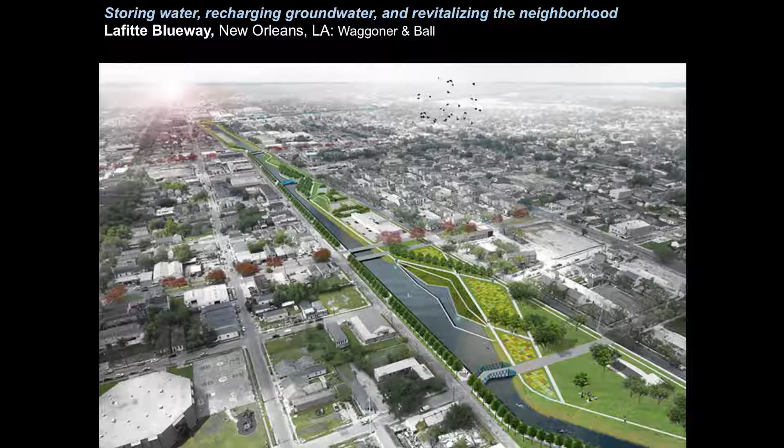I'm going to start with this image, which I hope most of you will recognize. David Waggoner is going to be speaking after this session at the plenary. Waggoner & Ball has done incredible work in New Orleans, thinking at a big scale about the kinds of infrastructural moves needed to help New Orleans absorb more water, while also enhancing quality of life and helping revive and boost neighborhoods.

So the Lafitte Blueway is the retrofit of an existing canal that goes all the way out to Lake Pontchartrain, from the French Quarter, but now widening and deepening it, allowing it to absorb much more water over time, and also having the greenway infiltrate more water and replenish the groundwater.

These kinds of big ideas and big moves can be absolutely transformational, but there aren't a whole lot of them. The Dutch do a lot of this, and I think that's also where Waggoner & Ball have been looking.

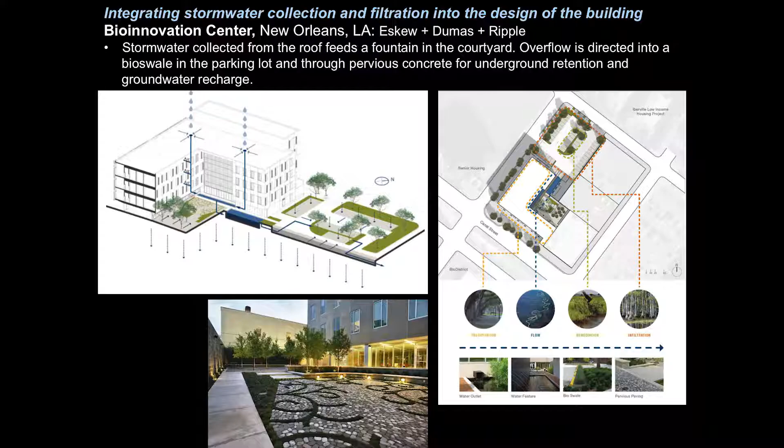But my only but here is this is an urban project. This is right in New Orleans, in a very urban place. There aren't so many of these out in the suburbs. Is it just that we expect innovation to only happen in the cities? Why do we need this in more suburban contexts?

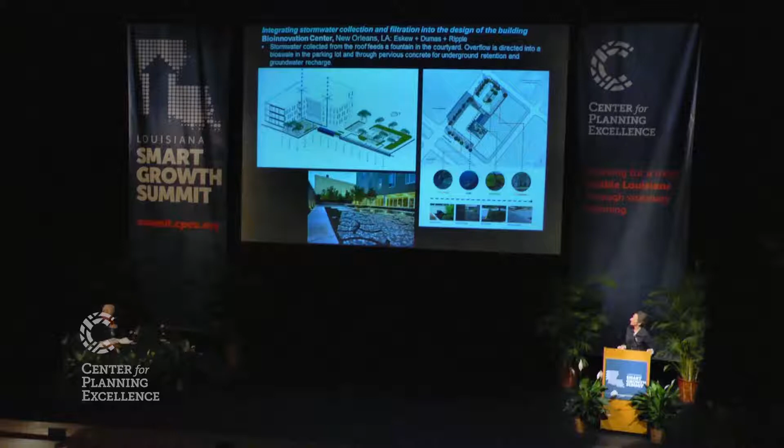I want to posit that, and keep going. So dealing with issues of water quality, I'm going to show a couple case studies. One common and terrific strategy is to daylight culverted creeks. The more you expose water to sunlight, to UV, you actually improve the quality of the water. You also expand the amount of space, how much capacity it has. It's really returning it to being a creek. You also often tend to increase property values because now it's a much more attractive amenity than just a pipe underground that nobody can actually see.

There are projects reconstructing wetlands, and I'll show some of those. Again, the strategy in almost all of these is to try as much as possible to infiltrate that runoff as close to the source. Wherever those raindrops fell, you want to try to get them into the ground as close to where they fell.

One of the new tools we have, and this is to see if you're awake, I thought the poo-sniffing pups would actually get a little giggle or post-lunch smile. Anyway, we do have some new tools in water quality.

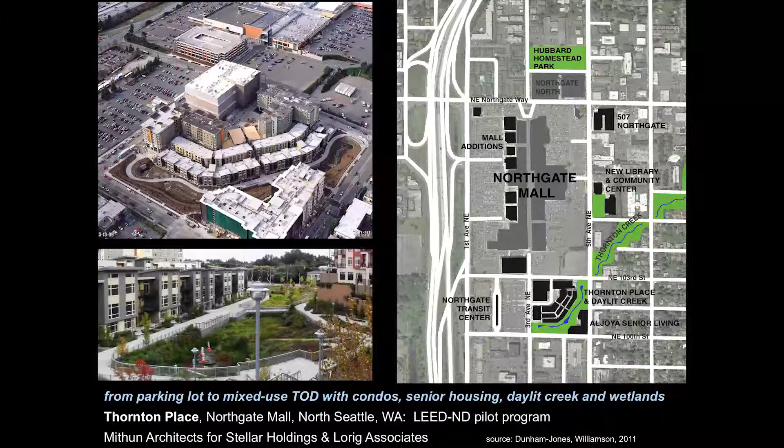Why there's a delay. All right, so here. This is an example in Seattle of daylighting the creek, the culverts. This is not a dead mall, this is actually a thriving mall. Here's just the end of it. Northgate Mall used to have just an enormous amount of parking.

They wanted to expand, but local environmentalists were still mad at them because when it was built in the 60s, they had paved over the headwaters of one of the four salmon creeks. So it really fell to the mayor to get the mall to do a land swap where they gave up a third of their parking lot. This has now become a transit center. It's bus right now, it'll be light rail in 2020.

Then they gave up this portion, which has now—the culvert is actually still way, way down, about 15 feet underneath the parking. But they've dug out everything above that, redirected the creek on top of it, so they can still get some overflow with the culvert. The creek is now daylit, and in this water channel you can see, under construction, how deep that is. It's really highly engineered, capturing the runoff from about 600 acres surrounding it, much of that parking lots as well as highway interchange, so those sewer inlets are all coming in, where it gets cleaned and cleansed on its way down the creek.

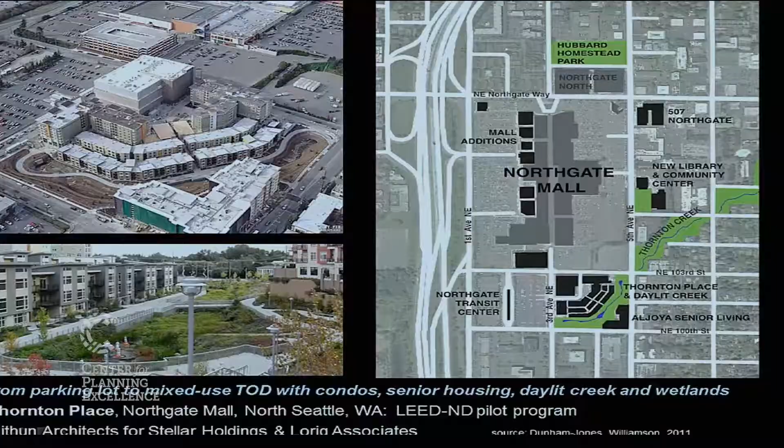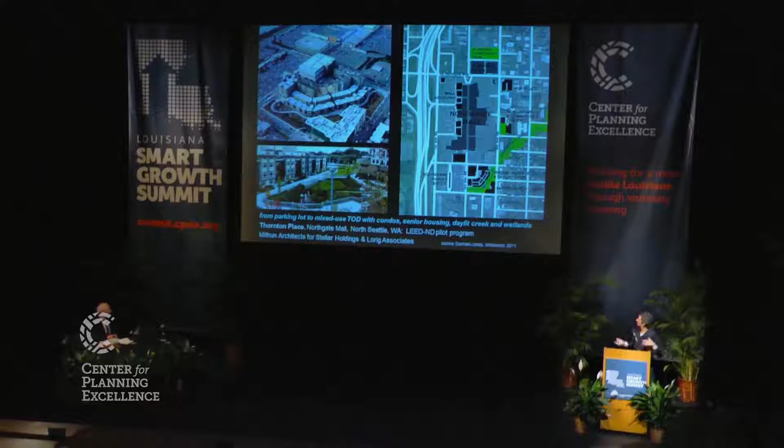They've also built senior housing in the foreground here, market rate housing, and there's an IMAX theater in there. But now, instead of just being a pipe in the ground, it's become this great amenity that people enjoy—there's a boardwalk, and people really enjoy watching all the birds and butterflies and plants in there. It's one of the more interesting, very successful examples of daylighting the creek and really improving the quality.

It was possible to get a grant to demolish the shopping center and reconstruct the wetland. They did that—I visited. That's my photograph; they built a beautiful wetland.

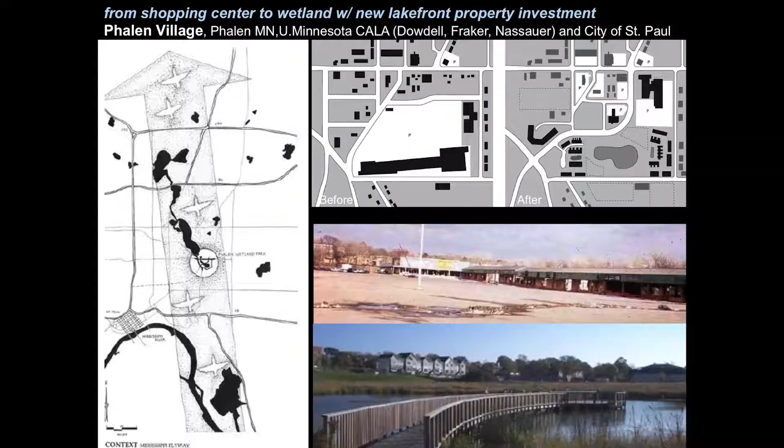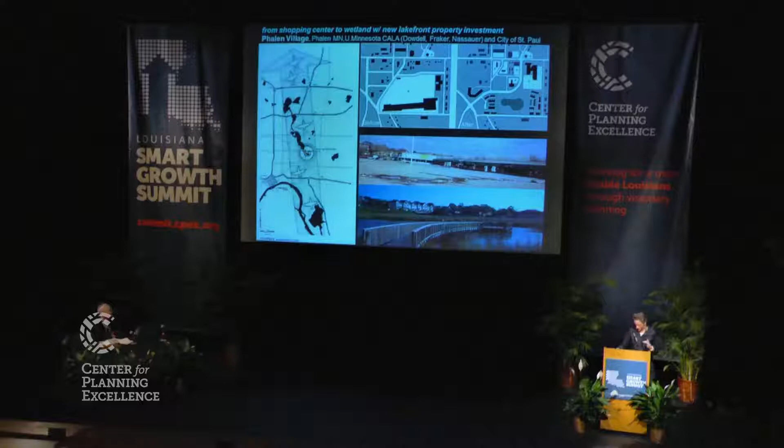Well, what that also did was create lakefront property and attracted the first new private investment in over 40 years to an extremely low-income neighborhood. So you really got this combination of the ecological sustainability of bird habitat with now new investment in a low-income neighborhood. Many more new buildings have come in since we drew that in 2007. So again, reconstructing wetlands is not an impossible thing, and it can have all sorts of additional pros that

come with it. So this is another example of building a wetland. There were already some ponds there in this case. This was a manufacturing site in a pretty suburban area in Wisconsin, a suburb that never had a true downtown. So when the industry failed, they decided to build their new town hall, town square, and then remediate some of the toxic soils by expanding what had already been some wetland into a bigger wetland.

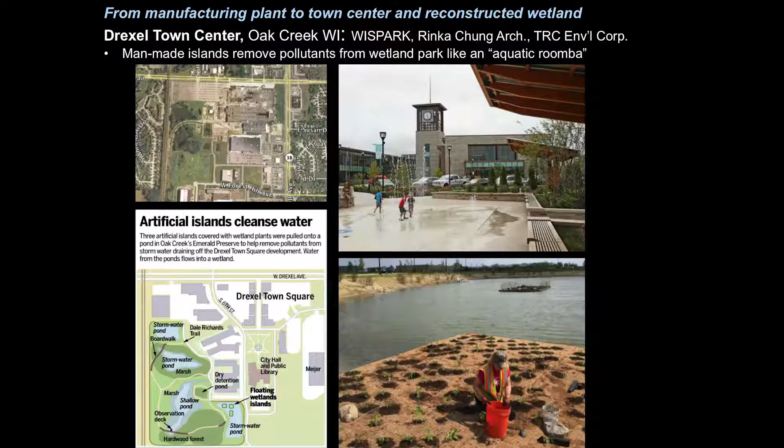And then they got these artificial islands that kind of work like Roomba vacuum cleaners. The islands are automatically piloted. They roam around the wetland, and they're planted with plants whose roots dangle, and as it moves around, the roots pick up a lot of the metals, and the microbes on them help clean the water. It's just interesting. These are all new technologies that are out there that people are using.

This one is, I think, kind of interesting. I'm going to show a couple. Minnesota, the land of lakes, its weather is quite different from Louisiana, but in some respects its geology is also rather sponge-like. So it's not completely inappropriate. And the watershed, the Ramsey-Washington Metro Watershed District, was very concerned about the degraded quality of the water in the lakes. There were lots of algae blooms, a growing number of problems, fish kills going on.

So they started with an audit of their commercial properties within the watershed to see who were the culprits. The mall, not surprisingly, with a big parking lot, was one of the leading contributors of phosphorus and sediment into the lakes. The mall owner didn't have to do a thing, but the Watershed Authority got about $5 million in grants and did 4 different phases of development on this project. They put in a lot of rain gardens, so instead of the all concrete and gravel tree island, the concrete curb breaks so the water from the parking lot drains into the rain garden.

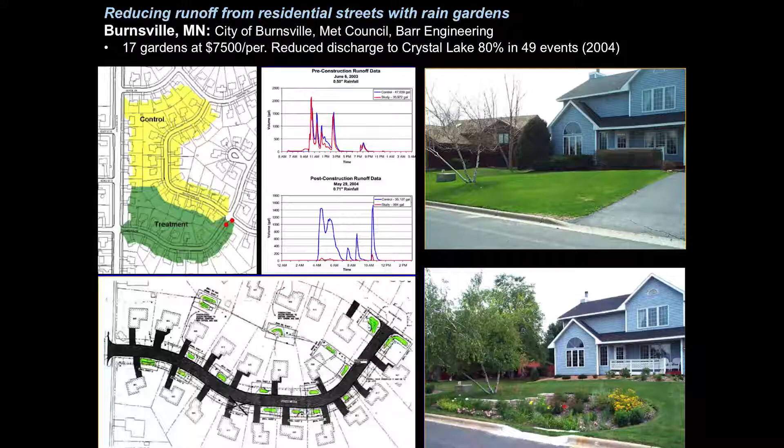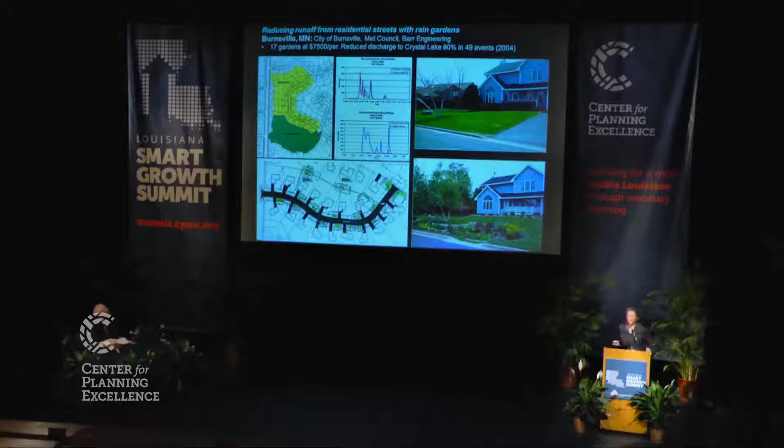And they found it cost about $7,500 per garden. But it reduced discharge to the nearby lake 80% in 49 events in 2004. So again, they were pretty happy with that. And so then they scaled it up even bigger, went back to Maplewood and said,

Oops, I keep doing that, I'm sorry.

So they took now 2 miles of streets and actually started thinking about, all right, the rain gardens are really effective, but we want to really make these living streets. We want to put in sidewalks, we want to deal with bikeability, walkability, a variety of things. So in this case, what they're doing, here's the old right-of-way.

The streets were about 31 feet wide. Now they're building the rain gardens and new tree wells inside the right-of-way, narrowing the street to about 24 feet. Again, the neighbors adopt the rain gardens, they give them a variety of flower packages they can choose from. And they have public art in some of these, but they're really building in that walkability with all of the sidewalks. And they found it's really been incredibly successful.

95% of homeowners do take care of the gardens, even after they've sold the homes. It's improved property values. These streets have more value with the rain gardens on them than the streets that don't. That led the city to then adopt a living streets policy for the entire city. So this small city of 30,000 people has 700 rain gardens and growing.

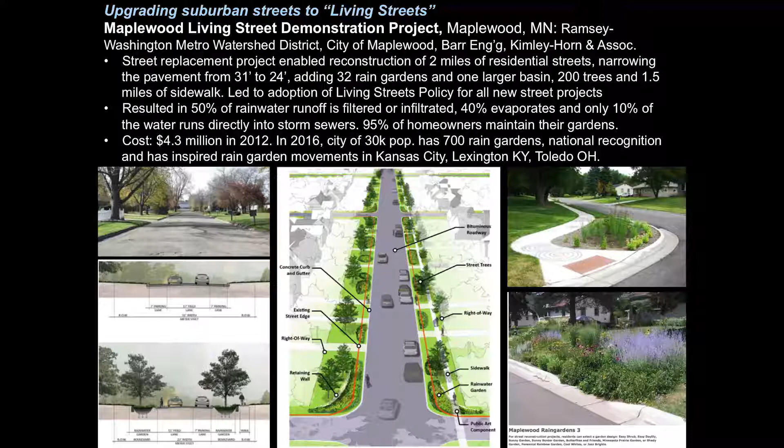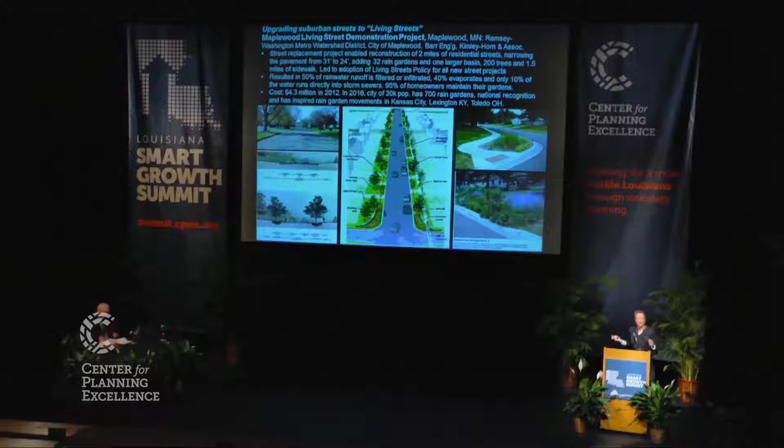That has now also inspired rain garden movements in Kansas City, Lexington, Kentucky, Toledo, Ohio, a number of other places, kind of recognizing that these are fairly simple, incremental moves that perform pretty remarkably well. So that's where the motivation was water quality. It is also helping very much with reducing the amount of water that's going into the sewers.

So what about when there's just too little water? You're in a place of drought. There's a lot of it. Generally, the strategies are, capture and reuse the water as best you can. You want to try to institute conservation, get people to not use as much water, and you can design landscapes, xeriscaping and things. And then most importantly, really, is, again, replenish groundwater. That one comes up with every strategy.

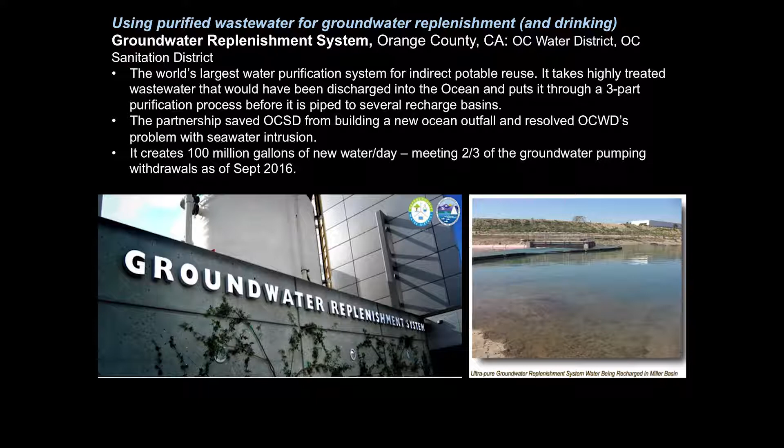So the biggest and so far apparently most successful groundwater replenishment system is in Southern California. And luckily they started this before the rather epic drought that they're in right now. They're right on the coast, and so they've been having not only problems with their aquifer, they've been draining their aquifer for years, they also have the problem of saltwater intrusion, same as here in Louisiana. So they're replenishing the groundwater using treated wastewater.

So basically, the Sanitation District got together with the Water District, and now the wastewater that used to be treated and then dumped into the Pacific Ocean is treated and then purified through reverse osmosis to an even higher level of purity, and it's then piped to the recharge basins where it slowly infiltrates back into the aquifer and is helping to reduce the saltwater intrusion. And then that is the water supply.

On the one hand, it's gotten some grief as an example of toilet to tap. That's the media description of it. But it reduces the yuck factor because they're really putting it back into the groundwater where it's mixed, and it's super purified, and it's actually increasing the quality of the water in the groundwater. It's really been seen as remarkably successful. They basically say, we're creating new water this way. And they have been saving a pretty enormous amount of water by treating wastewater.

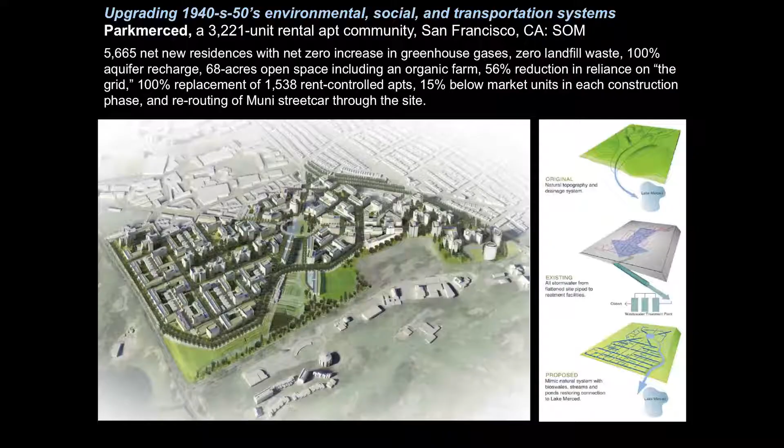So it's been drained for 70-some years of all the rainwater that would have been flowing into it, and now it's in drought, extreme drought condition. So new developers have bought up the project, and the plans now, SOM has done some really pretty remarkable planning to make this an incredibly sustainable project in terms of transportation, in terms of social equity, in terms of all sorts of things, but in particular, in terms of water.

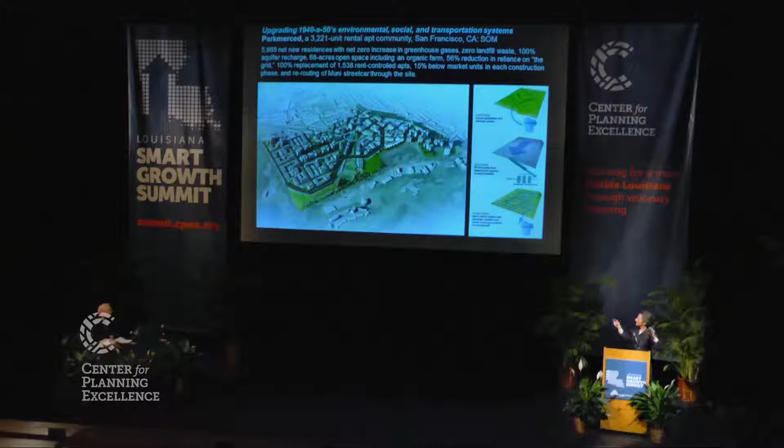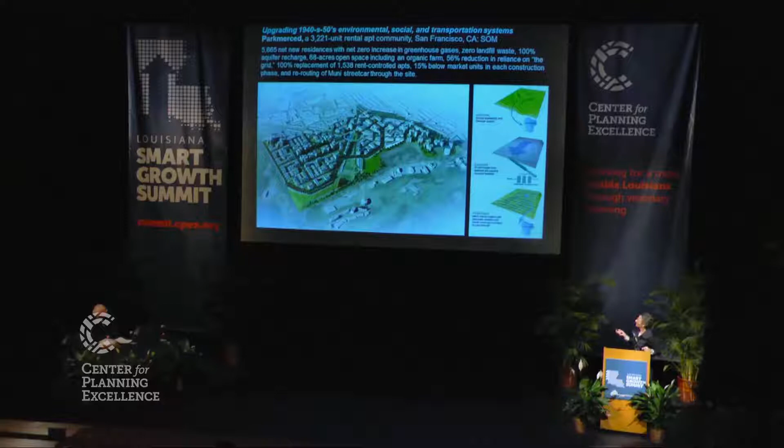They are trying to return it back to the original site's condition where every bit of water drains into that lake. So instead of going into the pipes now, job 1, they're removing every single pipe. So every bit of water that falls on a roof, on the ground, on a street, will find its way into now a highly agriculturally determined landscape. And they're doing this while they're more than doubling the population. So it's going to be an interesting one to see.

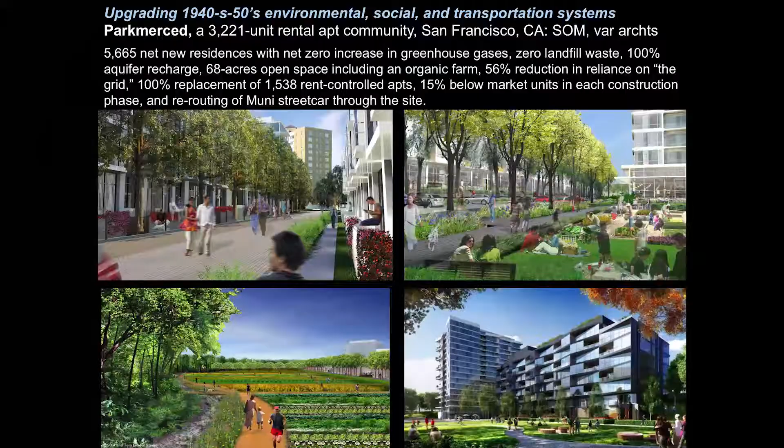These are some of the early renderings where you see a permeable pavement on more of a paseo, not a driving street, but also now with the stormwater trench to capture and collect rain from the roof and then drain it to some of the farming, a lot of urban ag being integrated and woven into this very high density project.

And this is one of the more recent, just I think last month, renderings of one of the new buildings that's about to break ground. I think 4 are just starting right now. So pretty interesting to see how this one really evolves. But I think that removal of the water in the pipes and rethinking how we treat that landscape so that it can absorb as much water as possible. They don't just want to have lawns.

It depends on soil conditions, but the average American lawn, if it is not aerated, you know, you roll the thing with the spikes on it and aerate it, it becomes just as compacted as asphalt after 20 years. So you get just as much runoff. It is just as impervious after 20 years if it's not properly maintained. And most of them aren't.

So here in Louisiana, there's also some really interesting questions: what do we do with the wastewater? Where should it be going so that it could actually be useful to help us replenish our groundwater? And so, I don't know if I'm pronouncing it correctly, Luling Oxidation Pond Wetlands in St. Charles Parish is, I think, a pretty fascinating project where the treated wastewater is being piped directly into the wetlands to both help replenish and revive the wetlands, but also because the wetlands are one of the best places for carbon sequestration. You've got so much biomass and living material that is just absolutely sequestering all of that carbon.

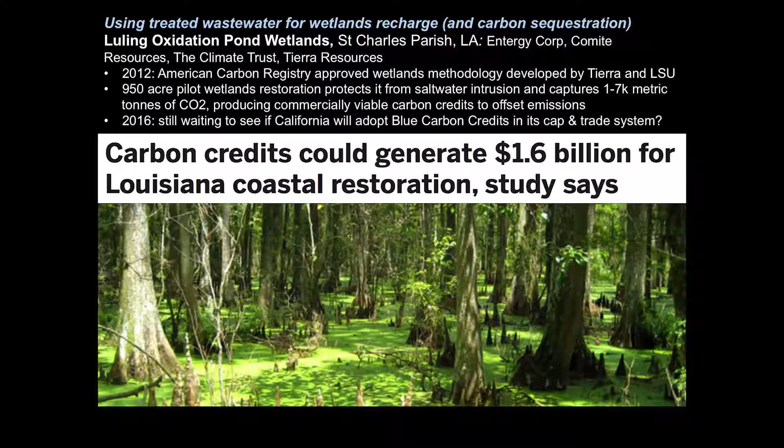California right now is the only state that requires companies that have emissions to buy offset carbon credits. For other companies it's voluntary, and so there's the opportunity to actually pay for restoring the wetlands by selling the carbon credits and using wastewater as one of the real strategies to do that. Again, a pretty interesting question.

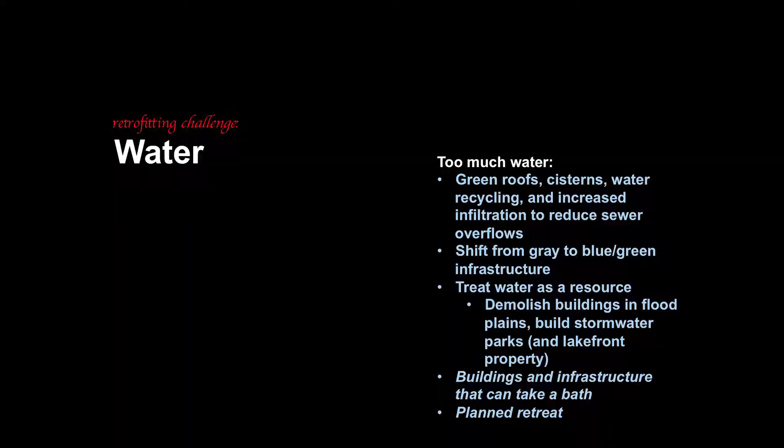So now we get to the question of flooding and too much water. What are the strategies really when you have just simply too much water? At a building scale, you build green roofs, cisterns, you try to introduce water recycling, and again, increase infiltration any way you can to reduce sewer overflows. In general, we're seeing a shift from gray infrastructure, the world of concrete and culverts and steel pipes, to blue and green infrastructure, more building of wetlands, building of bioswales, using ecosystems and ecosystem services to do what they naturally do with water, which is cleanse it and convey it.

We're seeing also some pretty exciting projects that really begin to treat water not as a problem, but water as a resource. Certainly, as I showed in the earlier example about lakefront property, people are attracted to water. Water, when it's not a threat, absolutely enhances property values and enhances our quality of life. So increasingly, there are opportunities to build stormwater parks that can take a bath now and then. They're designed to hold the water, but they might be beautiful parks during most of the rest of the time.

I wish I saw more examples of buildings and infrastructure really designed to take a bath. I think we need more of that. Then there is the discussion that still needs to be had about, are there times when you simply start to plan retreat, if there is too much water, too much flooding, too much subsidence, and those kinds of issues. So some examples.

So this is an interesting example, and I try not to show too many examples from Portland, Oregon, because everybody rolls their eyes and says, oh, Portland's the exception. We can't do everything that Portland can do. They're too far ahead. But what's useful about this example is I think it actually points to an absolutely common issue. So this is not in downtown Portland. This is the other side of the river.

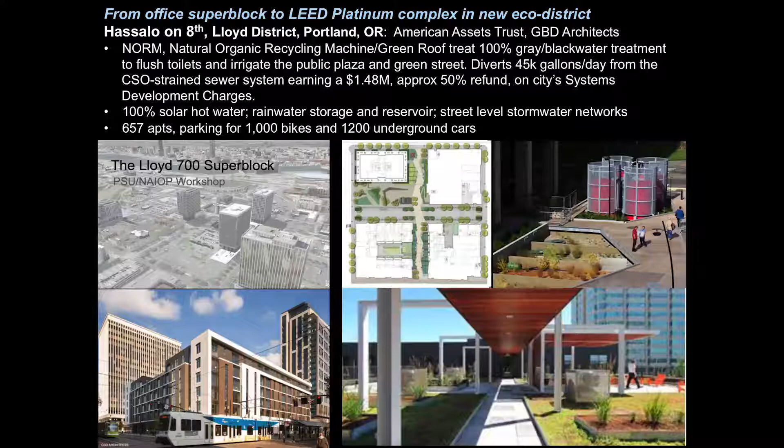What's also interesting about this project, I think it's worth mentioning, because it is on light rail, they didn't build a whole lot of parking spaces. There's parking because there's also retail on it, but for the residents, they actually built more bike spaces than parking spaces. So there's 657 apartments and parking for 1,000 bikes.

And in the first 3 months, when I think they were about 70% leased up, every bike parking space was already gone, and the car parking, they still had tons of it. So they've actually had to rethink; they're going back in and taking out car parking, putting in more bike parking. But it is Portland. That's so Portland.

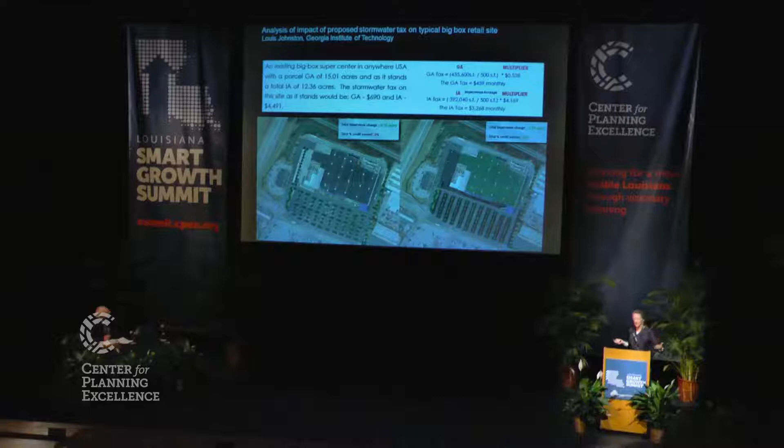And so on the topic of how do we charge for water, Philadelphia now has stormwater utility fees, and you are taxed based on how much impervious surface you have. A student of mine did a little study of what if you did tax people, but you also gave them a tool so they could figure out that if they put in green infrastructure, a green roof, planted more trees, you'd give them a break on that utility tax.

So in this example, a typical big box might actually owe, for its impervious acreage, as much as $4,000 bucks a month, but if it did a lot more of the green stuff, it could drop that significantly. Well, I think it would drop from the $4,000 then to the $3,000. So, people are playing around with these things.

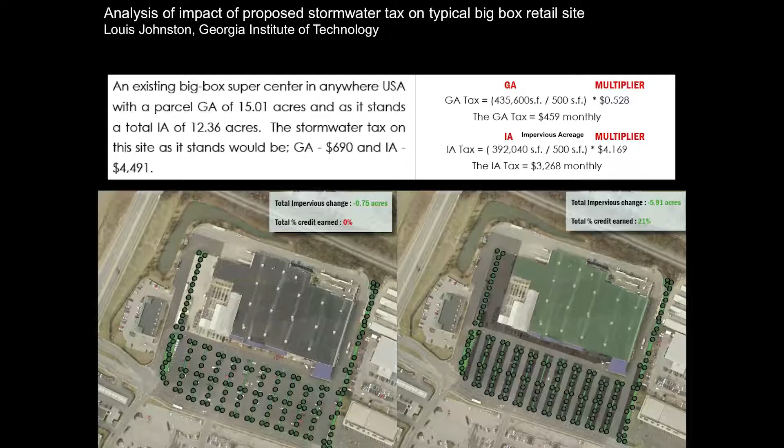This one I really want to succeed. I'm waiting to see what actually happens.

This is just north of Philadelphia, a 500-acre office park. When a dead mall dies, it's 50 to 100 acres. When an office park dies, it's 50 to 2,000 acres. This one is 500 acres, built in the 50s and 60s, on top of 4 creeks. Because back then, you just put the creeks in culverts and assumed that wouldn't be a problem. Well, it's obviously become a huge problem.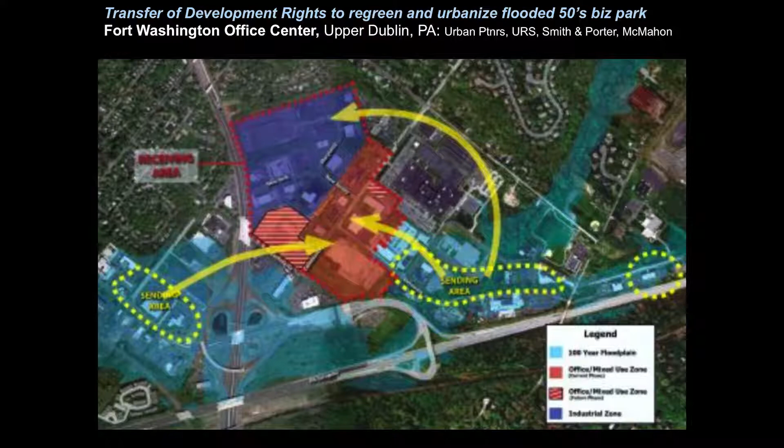The low-lying areas have been flooding like mad. So now they've set up a transfer of development rights that allows property owners here to sell their buildings and transfer their development rights to the high ground, which they want to see densified and urbanized, with a sort of new urbanist plan for how the high ground could be redeveloped. They're located right on a SEPTA commuter line, and if they got dense enough, maybe it could become a commuter stop to Philadelphia. So I think it's real potential, and the city is paying for demolishing the buildings that are being flooded all the time and turning it into park — not with a lot of trails, but really just returning it to nature, letting it absorb floods and be part of their resiliency planning for the future.

As far as I know, they adopted this about 1.5 years ago, and no one has yet used the transfer of development rights. Fingers crossed, because I do think it's a useful strategy, but TDRs are pretty complicated and often take a while before they work.

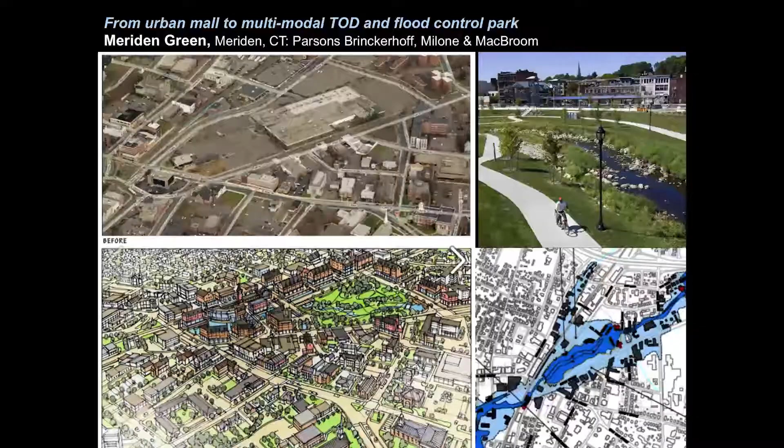Here's another example of building a stormwater park — somewhat similar to the last one. This is Meriden, Connecticut, a small town that built a mall with urban renewal money right in their downtown in the early 70s. We did that in a lot of places: built suburban-style malls in downtowns to help them compete with suburbia. Those are actually failing at an even higher rate than suburban malls. But this one didn't just fail — it flooded constantly because it was built right on top of a creek.

Here are the floodplain maps. They finally just gave up — it had been vacant for years — so they demolished it, and literally a month ago they opened their brand new stormwater park. It's designed to capture rainwater from most of the downtown and hold it during major storms, hopefully helping the rest of the downtown revitalize with an attractive green park at its center, having solved the flooding problem.

In Atlanta, we've had some of the same problems and built an award-winning stormwater park. But what's really interesting to me is how the interconnection of pieces that were not master planned together have come together really beautifully.

The big transformational project in Atlanta right now is called the Beltline — a 22-mile loop, essentially a rails-to-trails project. It started as a thesis project out of Georgia Tech, but has also become part of a 22-mile arboretum. It will have transit eventually; the right-of-way has been preserved, but the funding isn't there yet. We haven't even completed the whole 22-mile trail.

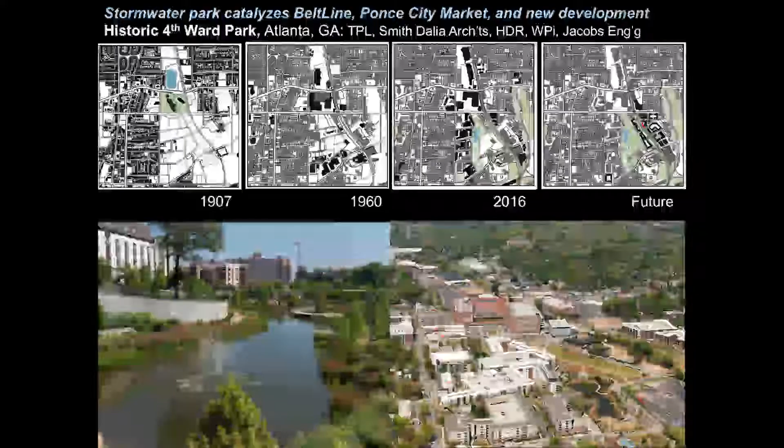Ponce de Leon Avenue here, North Ave here, eventually were to help people get to this amusement park and the lake. But then the city wanted more development, so they culverted the creek and successfully attracted Sears to build one of 12 major warehouse distribution centers in the country, sending out the catalog and all their goods. And of course it was located right along the railroad.

So Sears agreed to come in and they built this massive building on top of the creeks that had been culverted. Sears was there until the 80s, then they were out, and the city adopted this abandoned thing as sort of City Hall East, since they only occupied 2 floors and didn't really know what else to do with it. All the land behind it was just a big municipal parking lot, and it was flooding like mad.

The city was trying to sell this, and they actually, had anyone been to Chelsea Market in Manhattan? It's a similar big brick industrial warehouse building that's been completely re-inhabited with restaurants and little shops at the ground floor, cool innovative businesses renting up above, and some apartments. The mayor went to Chelsea Market in Manhattan and said, that's what our Sears building should become. And he happened to get the same developers interested.

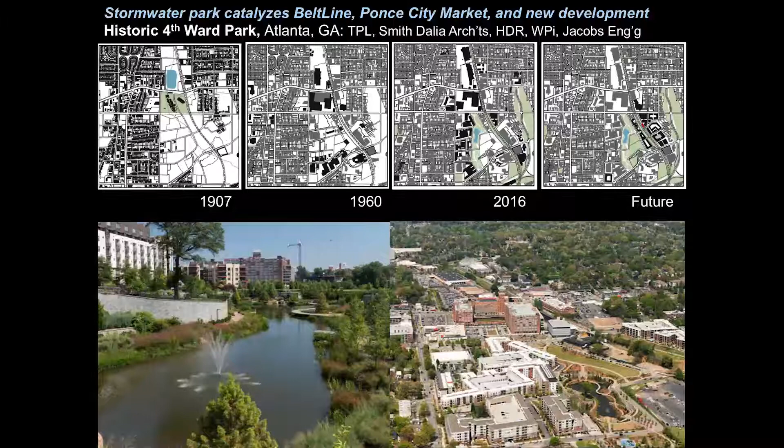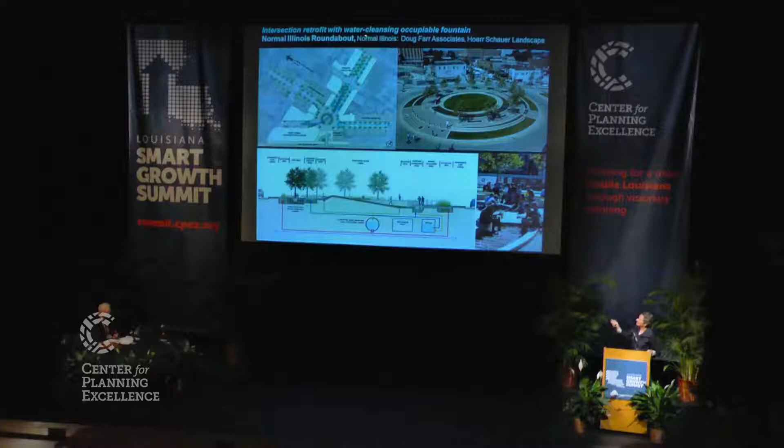So they actually set up deep tree wells, brought in street trees with tree wells that bring the water down to a new roundabout. The water comes from these tree wells to an old cistern they found, and also a new cistern they created. They then run it through little artificial bogs, these layers are the bogs, and it gets cleaned in the process, not to a drinkable standard, but to a touchable standard.

It's become an incredibly popular public space. People love to come, people are attracted to water, and then the water also goes back and actually irrigates the trees. So getting a loop and a cycle there, that's pretty great.

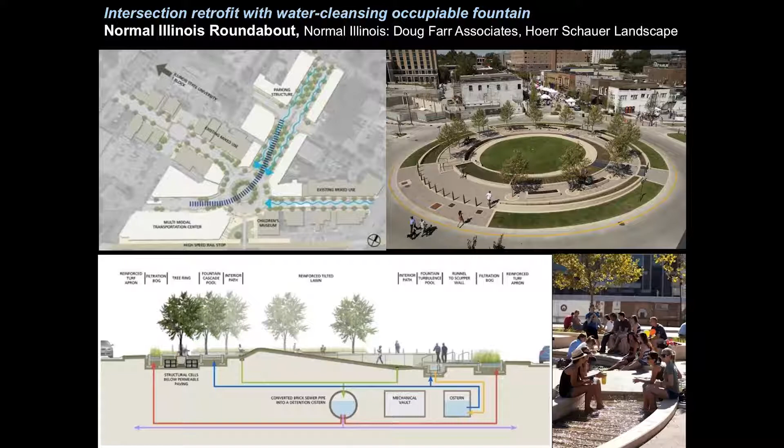All right, last slide. There we are.

I think, to sum up, I'm seeing a lot of shifts in practice. Certainly from when I was trained in school, it's not about getting the water away. It's keep the water, store the water, reuse it, infiltrate it on-site or locally. A lot more interest in treating wastewater as a resource.

I haven't shown examples, but there are some projects really trying to capture the waste heat, especially from wastewater, and recapture the nutrients from wastewater. There's a lot of this, especially for urban agriculture kinds of projects, and certainly replenishing the aquifers and wetlands just seems like such a smart thing. I'm glad to see we're doing more and more of that.

And in general, bioswales and rain gardens instead of retention ponds. We all know the old model, especially in suburbia, was you develop a property and on your lowest point you make a dry pond surrounded by a chain link fence—that's your retention pond that holds water for a little while, but it's just ugly. It doesn't add any value to the ecology or to property tax values.

All of these strategies, I think, are now leading to some shifts in policy. Some are happening, some probably should be happening, and some, I don't know, maybe they shouldn't be happening—so I put these in question marks. I would love to see a lot more regreening of defunct suburban property types.

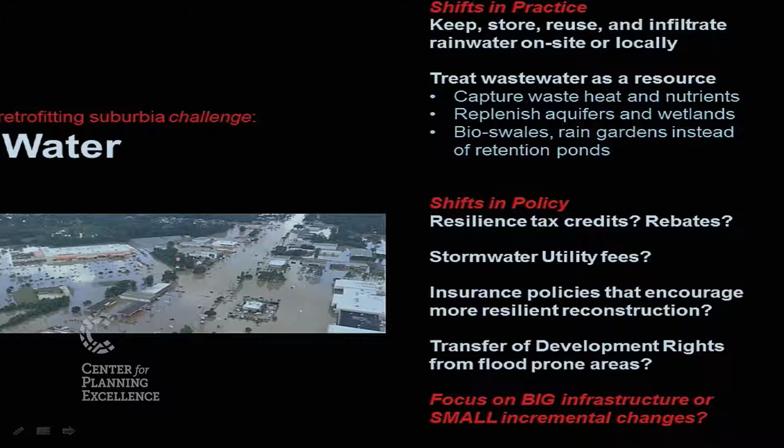Every community that has a dead mall, a dead office park, what they want is redevelopment, but the reality is when a property dies, there's a reason, and often that reason is the market has moved on—the loss of middle-class jobs that can support that use. Often it makes more sense to demolish, to regreen, to build in resiliency.

Of the 1,400 examples in my database, only 2% are regreenings. We don't have the kind of financial and legal mechanisms mainstreamed to really help this happen. We need a lot more of them. I'm throwing out on the table, what if we had resilience tax credits for something like that?

Some cities—Prince George's County, Montgomery County—have a rain garden rebate program where they'll basically pay you for putting in permeable paving in places or putting in a rain garden. Stormwater utility fees we are seeing in some places, and probably need to see in more.

One of the ongoing issues: every time we have a natural disaster, there are people pledging that we're going to try to make this into an opportunity, not just replace the dysfunctional, flood-prone property, buildings, and things that were here—we're going to rebuild better and more resilient. And yet, most of the time, we just end up building back exactly what we had. We seem to be caught in this cycle.

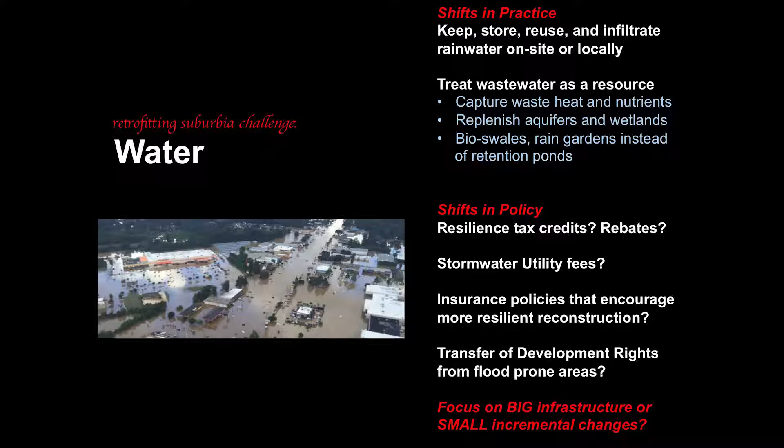So finally, in closing, I want to come back to the question of how to stop problems like this from happening again. The question is: can we stop it only through really big infrastructural moves—who knows where the money's coming from—or can we do it with smaller incremental changes? Again, I don't really know the answer. I just know that right now what I'm finding are more often the smaller projects.

And so I leave those open for discussion. So thank you.

Thank you, Ellen, for that very interesting and inspiring presentation. I think the answer to your question is that we probably need both—we do need the big infrastructure adaptations, but there are a lot of incremental things that can be done. And one of the things you talk about in your book is this idea of incremental metropolitanism, as you call it. That's a topic for another day, but it's an important concept.